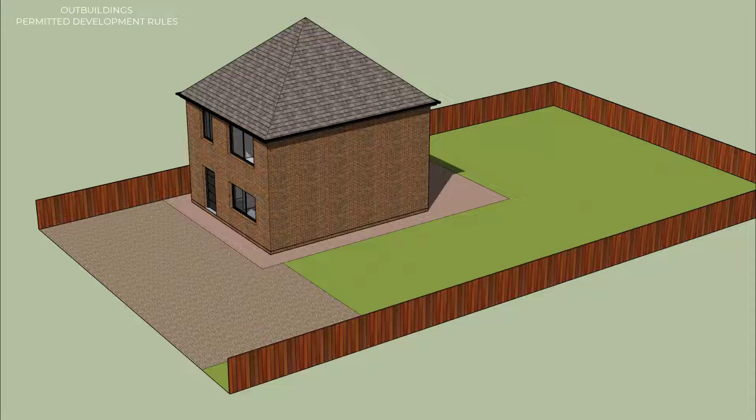This video is part of our Permitted Development Rights series, a bunch of short videos with the aim of giving the essential information of how to extend your home without planning permission.

In this video, we'll deal with outbuildings, which could be a garage, a gym, an office, a playroom, a swimming pool - it's probably easier to say what they can't be. The rules allow, subject to conditions and limitations, a large range of buildings on land surrounding a house. Examples include garden sheds, storage buildings, and garages, as long as they can properly be described as being for a purpose incidental to the enjoyment of the house.

A purpose incidental to the house would not, however, cover normal residential uses such as self-contained living accommodation, nor the use of an outbuilding as primary living accommodation such as a bedroom, bathroom or kitchen.

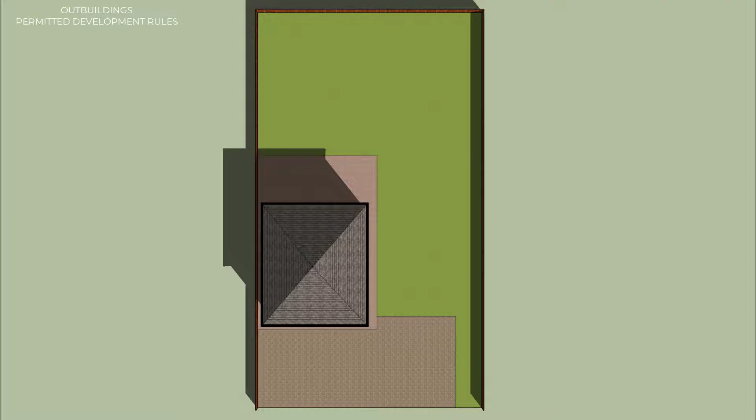Now we have a detached house on a large corner plot with a fence perimeter, front elevation, side garden and rear garden. If we look at the plan view, we'll go through some requirements to comply with outbuildings. They're not permitted when a dwelling has been granted by virtue of Class M, N, P, PA or Q - i.e. a change of use or barn conversion - so these cannot have permitted development rights for outhouses.

To comply with the rules, the total area of ground covered by buildings within the curtilage should not exceed 50% of the curtilage. Curtilage being the garden, minus the house - so the garden space minus the house.

Any part of the building should not be situated forward of the principal elevation of the original dwelling. The outhouse can only be of a single story.

The height in terms of a dual pitch roof can be a maximum of 4 meters. If the building is within 2 meters of the boundary, the maximum height can only be 2.5 meters, and 3 meters in any other cases away from the boundary. The eaves height of the building should not exceed 2.5 meters.

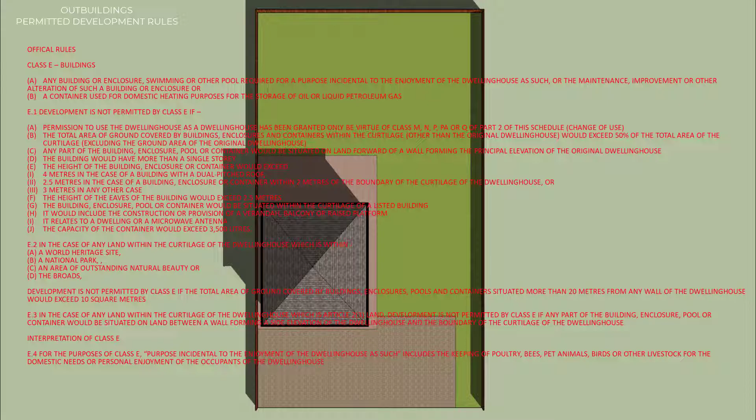For interpretation, purpose incidental to the enjoyment of the house includes the keeping of animals, livestock, domestic needs, or the personal enjoyment of the occupants of the dwelling house.

Looking at this plot, in this case it's 460 meters square - that's excluding the house, so just garden area. Now 50% of that, 230 meters square, is highlighted in green there. That is potentially what can be developed.

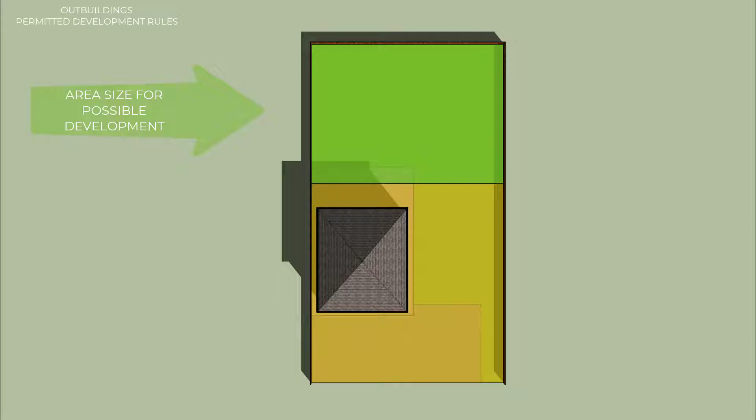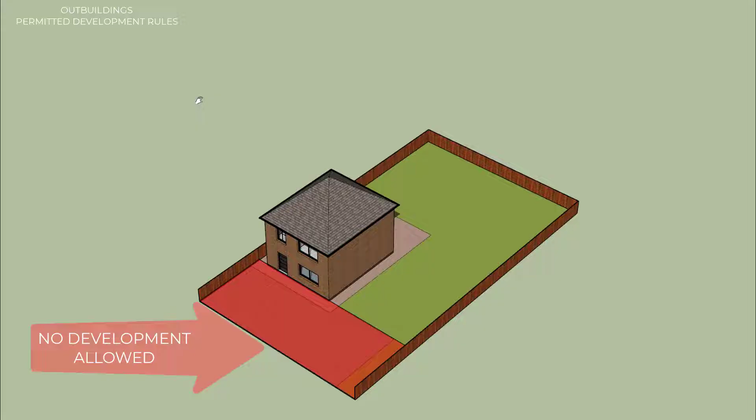If we look at what would be classed as past the principal elevation, the area highlighted in red is shown, which could not be developed.

The principal elevation, in most cases, will be the part of the house that fronts directly or at an angle the main highway serving the house. The main highway will be the one that sets the postcode for the house concerned. It will usually contain the main architectural features such as bay window, porch, and serve the main entrance to the house. Usually, but not exclusively, the principal elevation will be understood to be the front of the house.

There will only be one principal elevation to the house. Where there are two elevations which may have the character of the principal elevation, for example a corner plot, a view will need to be taken as to which of these forms the principal elevation.

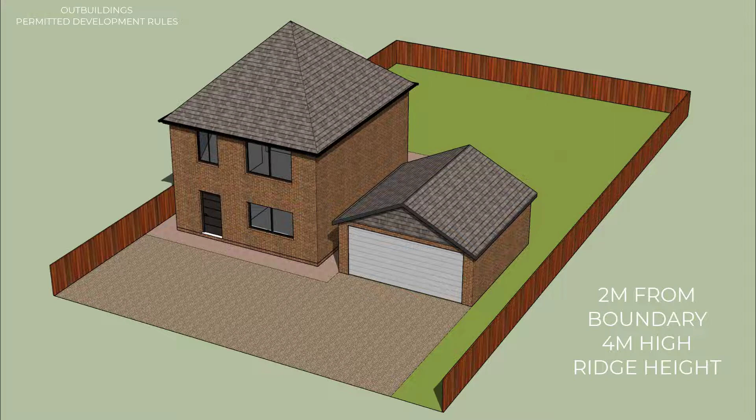Now if we add a double garage to the side of the property, in line with the principal elevation - this garage is 2 meters away from the boundary, so the maximum height of 4 meters to the ridge can be achieved, which is there to there, and this one is also 2 meters away from the boundary.

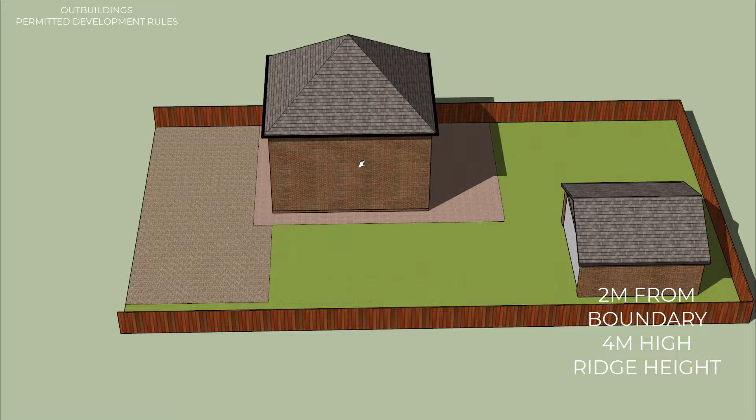Let's go on to our next option. If we now add a building to the rear garden similar to the front, the example is 2 meters from the side and the rear boundary to enable the maximum height to be achieved - 2 meters from there, and 2 meters from there.

Now if we wanted to move it closer to the boundary, that wouldn't comply. The height would be affected, so it'd have to be reduced to 2.5 meters in height, which could be done via a flat roof.

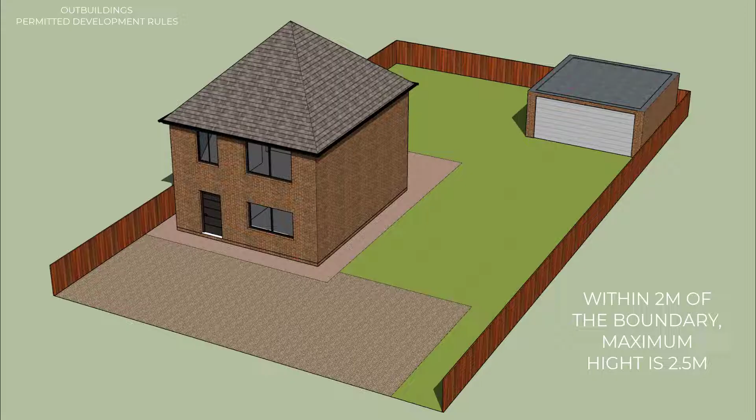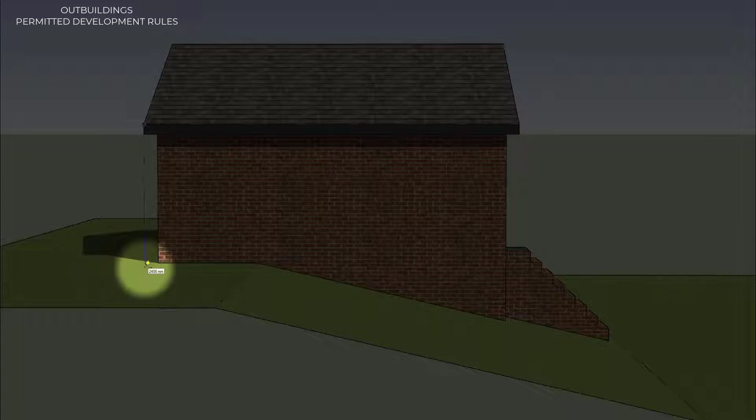When considering your ground levels, the height is always taken from the highest ground level. In the case shown, the ground level drops away, so the 2.5 meters for the eaves height would be taken from there, which as we can see is 2486 millimeters, just under 2.5.

Obviously it drops away at the back, but that isn't an issue because the height is taken from the front. This can still only be single story, so you wouldn't be able to develop anything underneath because it would make it 2-story.

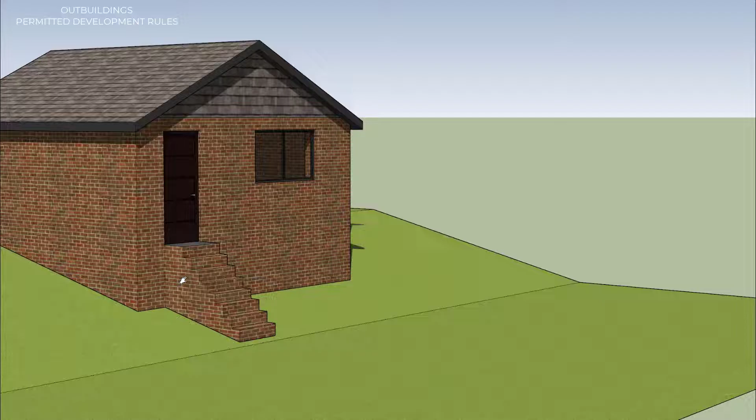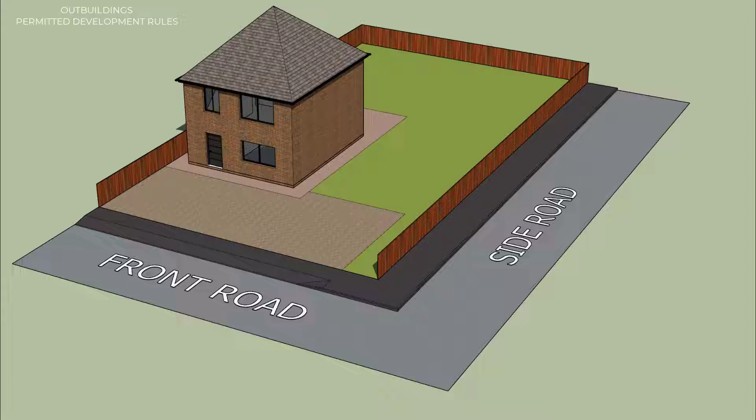Now the reason I highlight this is, if you're applying for an attached garage under permitted development rights, this would be a side extension, and because it faces the side road, you would have to apply for planning permission for this.

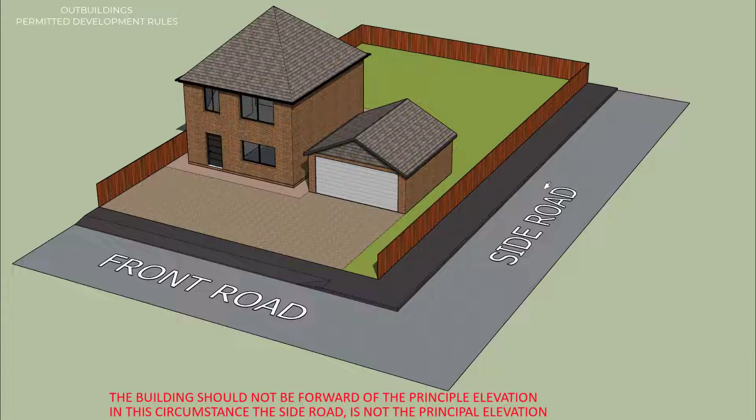But in terms of outbuildings, that should be okay to build as an outbuilding, because the principal elevation is the front road, not the side road, and there's no requirement for an application if it's closer to the main highway.

Obviously there are instances where permitted development rights are not allowed, where the rights have been removed in designated areas, in conservation areas and on listed buildings.

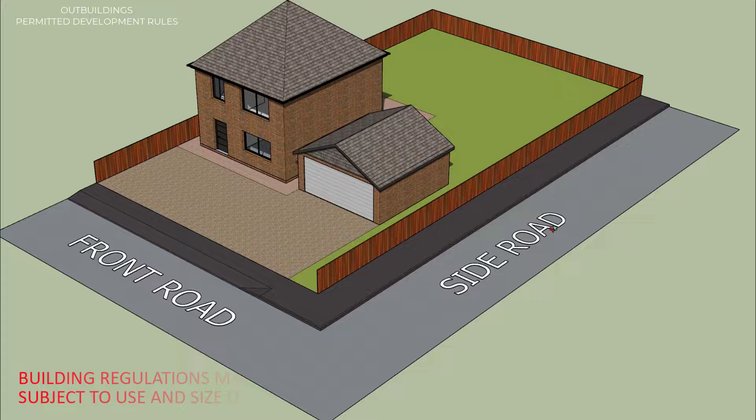Subject to the size of the building that you're building, building regulations may be required. Not always - it depends on the use and the size of the building that you're doing.